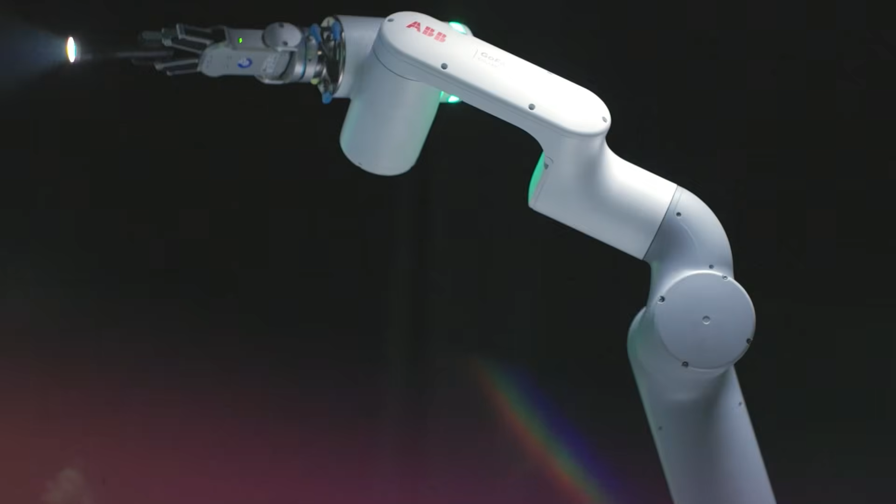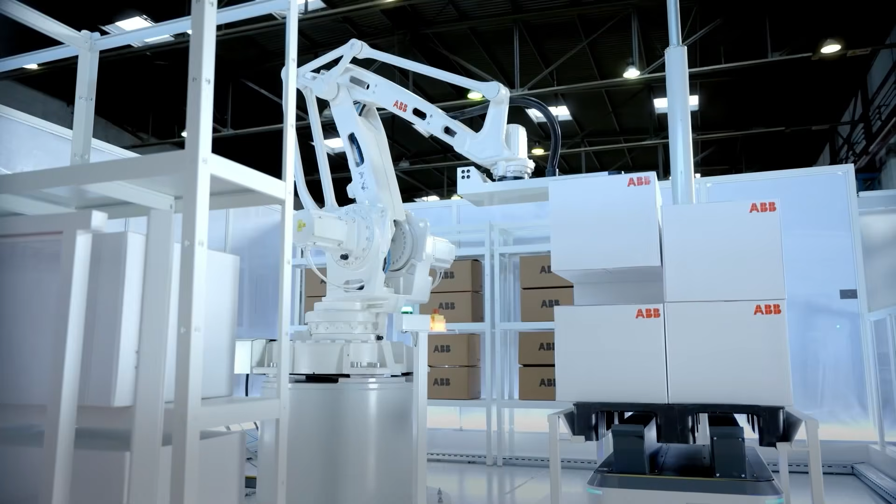From the world's first microprocessor-controlled industrial machines, through the birth of virtual programming and simulation tools, to autonomous versatile robotics that see, think, and adapt, ABB Robotics has never followed the progress. We have defined it. Making work faster, safer, smarter. From precision manufacturing to the frontiers of logistics, healthcare, infrastructure, and even data centers.

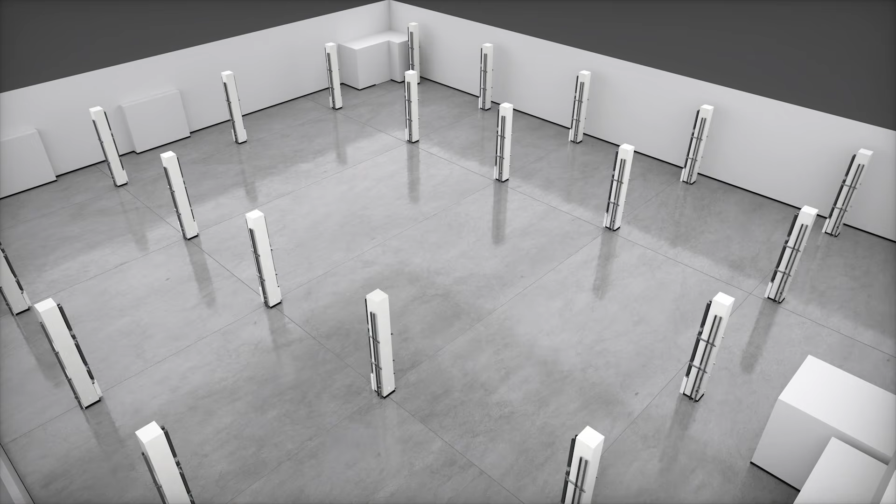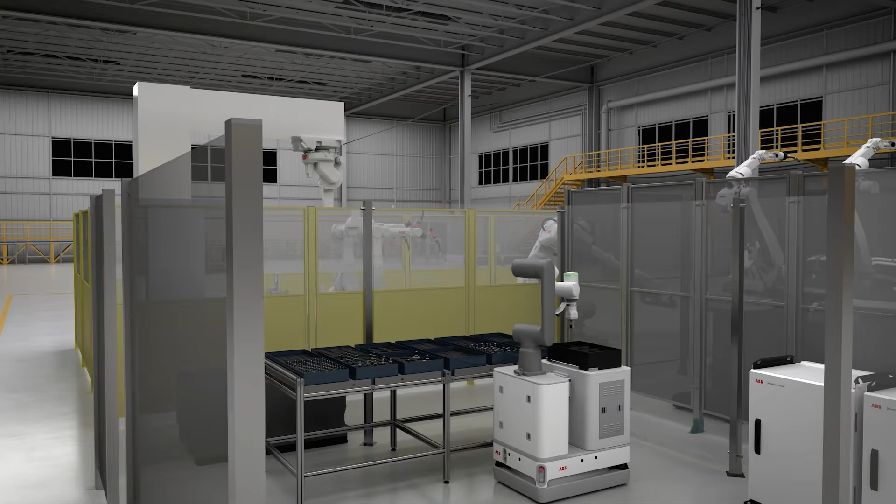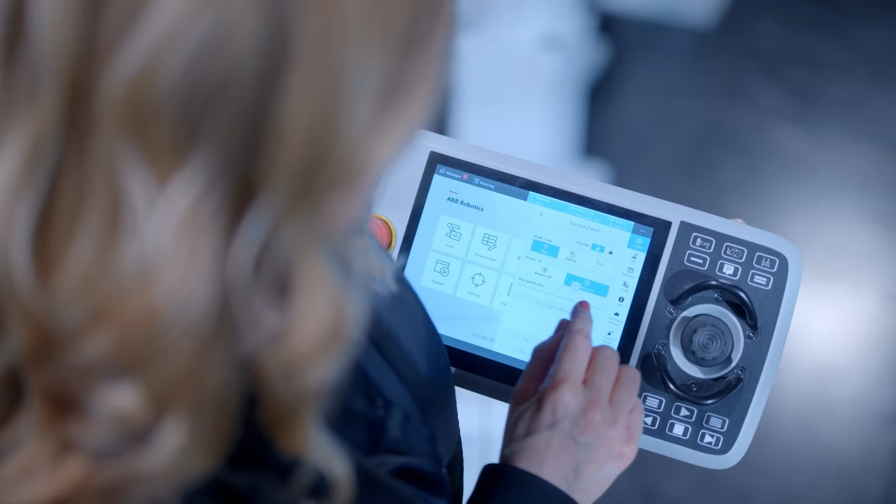Now, ABB and NVIDIA are truly fusing the digital and physical worlds. Translating physically accurate simulation into powerful robotic training. Creating robots that learn with unparalleled accuracy in the virtual world. Mastering how to build for the future before it even exists. This is the acceleration of industry as we know it. As fast and as precisely as we can imagine it. Redefining how the world is built.

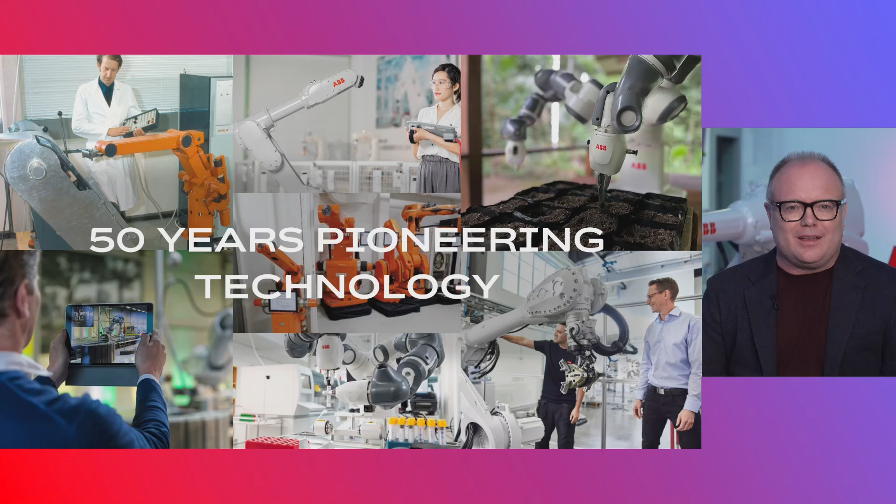For more than 50 years, ABB Robotics has led the evolution of intelligent industrial automation. As far back as the 1970s, we were pioneering the first generation of fully electric industrial computer-controlled robots, before introducing later smaller robots, collaborative and mobile robots with the ability to learn in real time and a digital twin simulation, allowing customers to visualize processes in the virtual world. Most recently, over the past decade, we've given our robots eyes through 3D vision, hands through advanced force sensing and precision dexterity, and mobility through autonomous navigation.

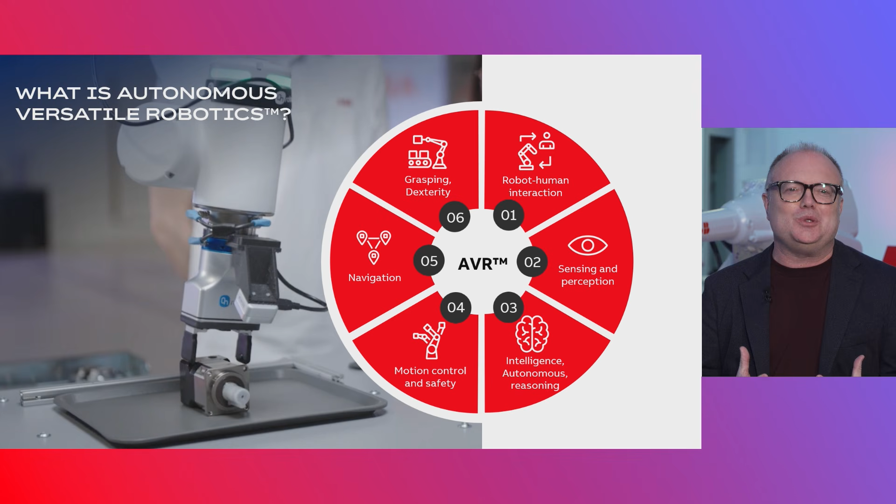We have created robots and the physical AI that goes with them that function beyond a fixed world of operating procedures and coding, and they understand instructions that they see or hear, and then plan the best way to achieve a wide range of tasks autonomously. We call this autonomous versatile robotics, the name for our unique blend of software and hardware that delivers true autonomy and versatility across the spectrum of industrial applications.

But for decades, one final barrier has limited the deployment of industrial-grade physical AI at speed and scale. Manufacturers have struggled to simulate real-world conditions, lighting, shadows, textures of the materials that behave just like they do in reality on the factory floor. That is known as the sim-to-real gap, and it has limited how quickly businesses can design, test, experiment, train, and deploy new automation.

But not anymore. Today, we have broken this barrier in a major breakthrough for robotics and physical AI. In partnership with NVIDIA, we are making industrial-grade physical AI real at scale, and right now, not tomorrow. Embedding the power of NVIDIA's Omniverse into our RobotStudio software, we can bring physically accurate simulation directly into our tool already used by more than 60,000 customers worldwide.

NVIDIA's accelerated computing allows us to create huge volumes of hyper-realistic images that can be used to train robots in the virtual world. Different lighting, shadows, different textures, different material properties, colors, everything a robot would encounter on a real factory floor.

These physically accurate simulations and the AI foundation models are continuously optimized with real-world data feedback, so the system is always learning and improving. The result is a unified workflow where developers can design, program, test, and validate entire automation processes virtually for any number of ABB robots anywhere in the world.

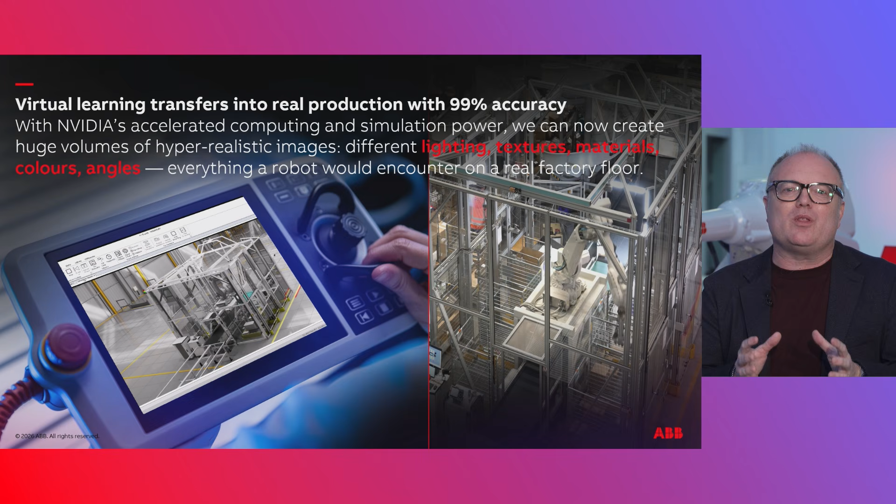And these real-world robots can be trained on the resulting AI foundation models with absolute confidence, because we are the only robot manufacturer with a virtual controller running the same firmware as the real robot, so virtual learning transfers into real production with 99% accuracy.

Instead of needing thousands of physical test runs, prototypes, and expensive parts, robots can see and learn and understand inside a simulation that then translates perfectly into the real world, matching precision in both virtual and physical worlds.

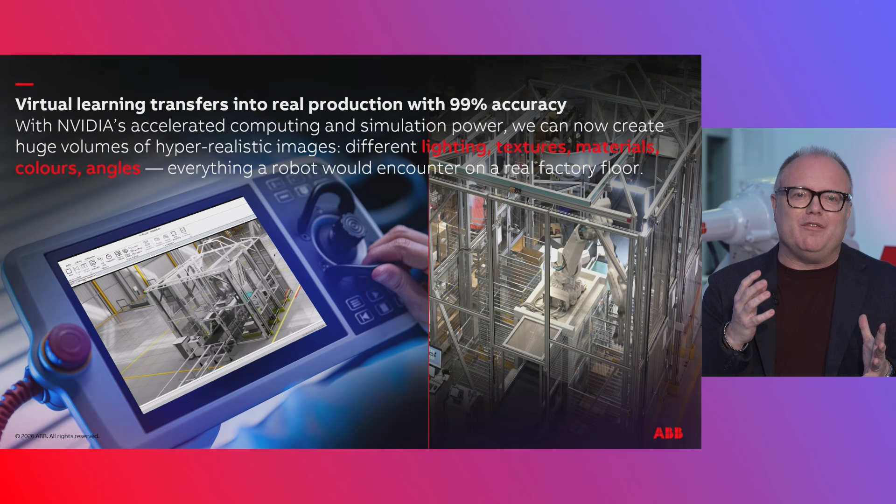Given the many wild predictions around robotics, you might think this is theoretical or future gazing. It is not. We call it RobotStudio Hyper Reality.

We already have pilot programs running with customers, giant companies like Foxconn, tech companies like Workr in California, and we will be rolling it out to our 60,000 users in the second half of this year.

RobotStudio Hyper Reality closes the sim-to-real gap. It makes industrial-grade physical AI truly ready for real-world deployment at scale.

It will fundamentally change how quickly and reliably manufacturers can move new and updated products from design to global production, cutting setup times by 80%, reducing costs by 40%, enabling concurrent engineering with no need for physical prototypes, and accelerating time to market for products by 50%.

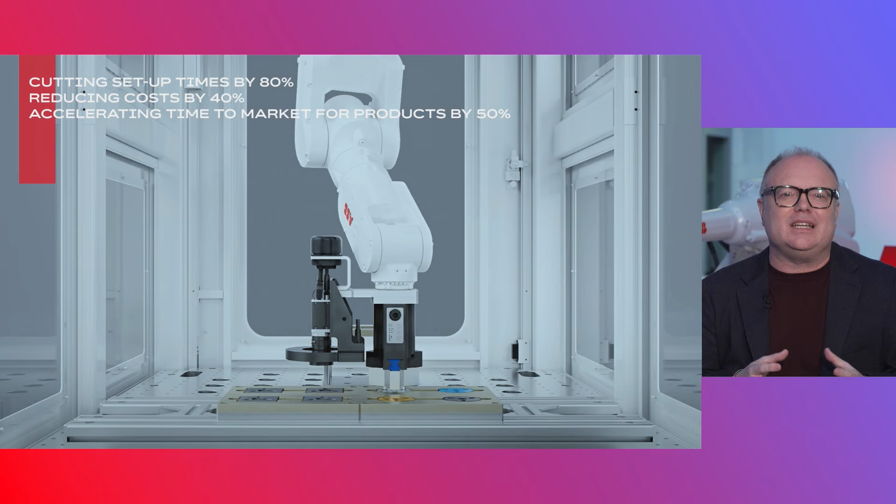A major breakthrough in the application of AI in robotics for advanced manufacturing, and the next step in our unique history of pioneering robotics progress. We'll show more at NVIDIA's GTC later this month.

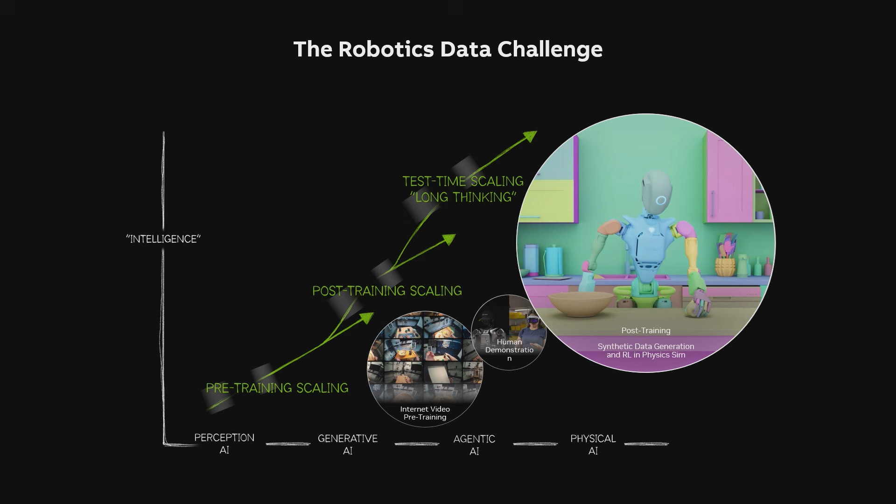So we've been expanding this collaboration with ABB by integrating our Omniverse technology into ABB RobotStudio. This integration brings advanced simulation and accelerated computing to ABB's unique virtual controller technology, accelerating how thousands of manufacturers can bring complex products to market.

Today, we are helping customers move from concept to production more quickly, safely, and at scale. With that, I'll hand over to the moderator to get the Q&A started.

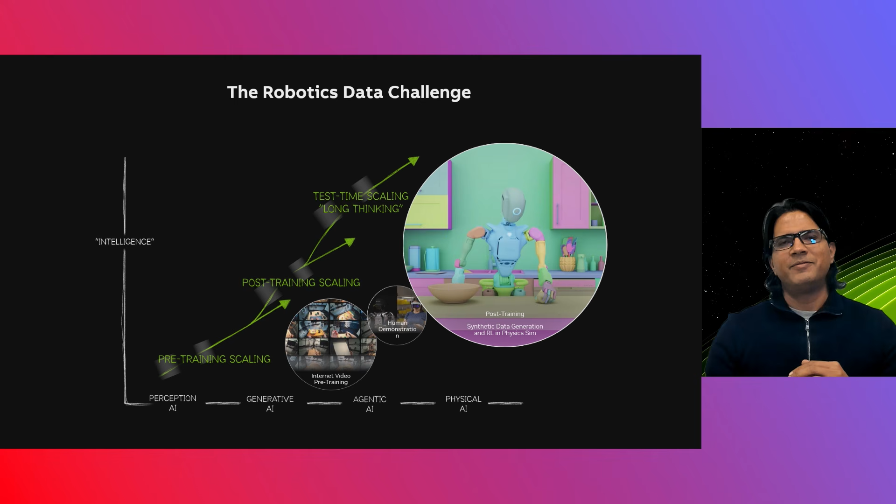First of all, to Marc: what is the benefit of the partnership for businesses? Maybe you could elaborate on that one a bit more. Once again, the benefits are twofold. On one hand, we are enhancing simulation. We make it hyper-realistic, and as a consequence, we can have better simulations, taking a broader scope of the system.

So hence, we are cutting times. We are removing the need for physical prototypes. That's a big benefit on cost and time. The second one is that within that same platform, we can train high-quality, high-grade AI models that then translate into more skills of the robots, more autonomy, more versatility. So you've got the simulation benefits, and you've got the benefit of more autonomy on the robots, one and the same platform.

Thank you for breaking that down so beautifully. Deepu, anything to add on that one? What would you say is the benefit of the partnership for businesses from your point of view?

If you look at robotics and automation for the last 50 years or so, it's been deployed mostly in these so-called high-volume, low-mix applications, things like automotive industry and high-volume electronics. But much of the world is in small and medium enterprises. And the reason it's almost impossible to deploy robots today is because it's expensive for these robots to set up and program by humans. Whereas in these small and medium enterprises, what you need is high-mix type of tasks. And the only way to solve that is to use a reasonably good enough general purpose AI brain. That's what we're able to do with the latest generation AI technology.